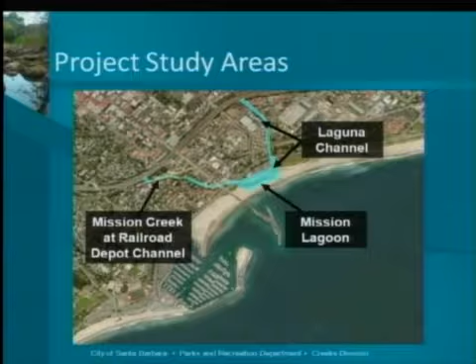George? Thank you. This evening I'll be giving an update on the Mission Lagoon and Laguna Creek project. It's a project that the city started actively pursuing about 2 years ago, so I'll be giving a brief update on what has happened and where we're going with it. To refresh everybody's memory, the project study areas basically entail 3 distinct, more or less sub-projects. Starting over on the western portion there, Mission Creek at the Railroad Depot Channel, and then on the waterfront, Mission Lagoon. And then on the eastern portion there, a small portion of Laguna Channel, which is known as El Estero Drain.

So for background, city staff and members of the public, including business owners, special interest groups, environmental groups, put together through a pretty long process of public outreach these project goals, which really encapsulated the Creeks Division's main purpose, which is to improve water quality, native plant habitat, wildlife habitat. But also because of the nature and location of these projects, encompassed a wider array of project goals, including flood control, which I'll talk about specifically as it relates to the Laguna Channel pump station,

a wide variety of surrounding infrastructure, including the multi-purpose pathway, the parking lots at the railroad depot channel, obviously the railroad tracks and the railroad depot itself, the many existing uses such as recreational uses along the waterfront, the harbor dredging operations, and then obviously the aesthetics. This is really a doorway to Santa Barbara. Public safety issues associated with both flooding, but also any sort of fall hazards associated with the creek restoration areas, and then ensure consistency with the numerous city projects, including the Lower Mission Creek Flood Control Project, and various other management plans that regulate and define a lot of the operations in the city waterfront area.

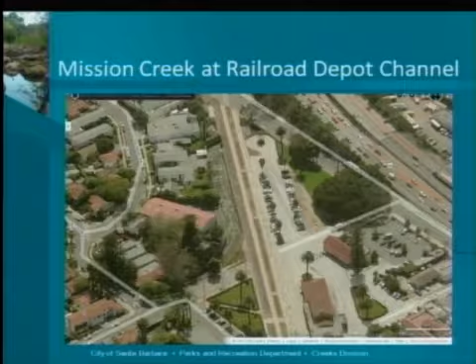So jumping upstream at Mission Creek, this is looking down on the railroad depot. So the actual depot building is in the center lower right there. And if you look right dead center in that photo, you'll see the actual channel itself. And to the right of the channel are the railroad tracks. And so let's jump down to a ground level view. This is looking upstream Mission Creek.

We've got these historic sandstone walls, which create a lot of constraints for doing any sort of modifications on this stretch of Mission Creek. Basically, those walls are part of the National Register of Historic Places, and so we can't modify them to an extent that would take away from the historic nature of that designation. And so really our focus was more, how do we restore certain functions to the creek, whether it's increased fish passage, better water quality, and more wildlife habitat within the confines of basically the channel bed.

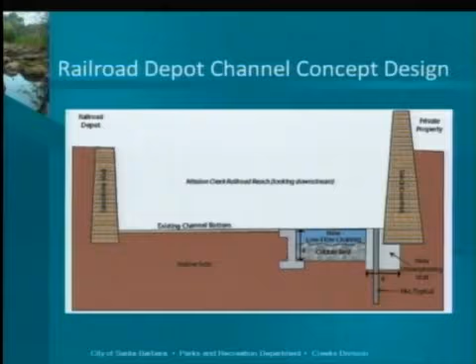Our staff recommendation is let's put this concept level out there, but let's not take it forward because we've got 2 other projects that are higher priority. This is available for either other agencies to look at as a potential design, or in the future, if there are modifications, this is one that is technically feasible at a concept level.

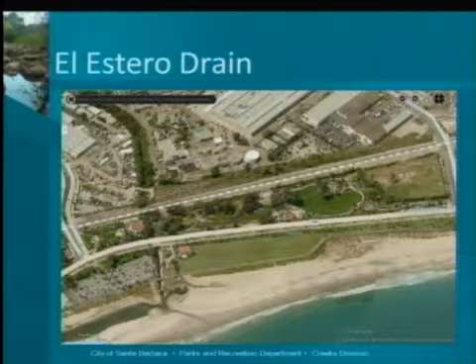And we can zoom in on that at the ground level. There's that big white tank there, and this is the existing El Estero Drain. It does have a bit of history that I outlined in the staff report. Basically, the summary of that is the city has an obligation to restore a portion of the channel. And the proposal that the Creeks Division is putting forward as a restoration plan would supplement that required mitigation that Public Works is required to do.

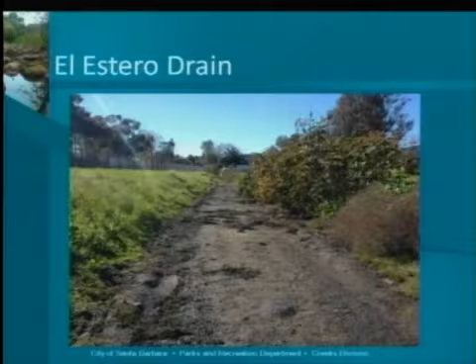And so what is the proposal then? You can see the existing condition right now at El Estero Drain is there is a channel bed there, not a lot of vegetation, mostly dominated by non-native exotic weeds such as castor bean. And then looking down the channel towards Laguna Creek, the bed itself is underlain by basically a plastic liner that was installed in 2002, and so Public Works, as part of their proposal, is going to remove that liner and do some restoration.

And so the Creeks Division is proposing to come in and, in the areas where Public Works is not restoring, take care of the rest of that portion of El Estero Drain and restore open water pond habitat that would be beneficial for southwestern pond turtles, emergent wetlands, so species such as tules, rushes, sedges, to provide some cover and shading on the channel, and then upland habitat in a mix of native grassland species and some shrub coverage. We don't want a really dense cover there because the southwestern pond turtles, although an aquatic species, use the upland areas for nesting and other parts of their life cycle. So that's the habitat side of things.

At a concept level, we also have a big water quality component, and there are obviously a lot of permitting issues and details to be worked out with this, but the proposal from the consultants is during low flows, so primarily during the summer, they looked at a possibility of moving some of the water in the main stem of Laguna Channel, pumping that up to the top of El Estero Drain, and basically letting it flow through what is more or less a constructed wetland that has both habitat value and a water quality improvement value. So that's looking at it from top down.

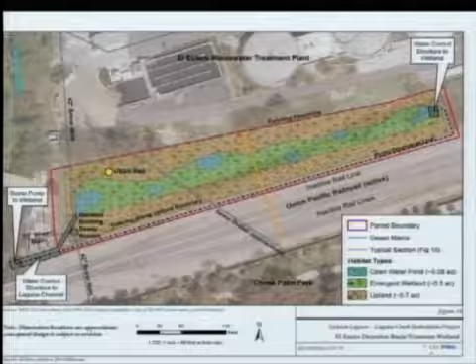If we do a cross-section, another big part of this concept is to do more excavation from the existing topography. So you can see in that hashed line, that's the existing topography, and so the proposal would be to remove all of that material and create more wetland habitat.

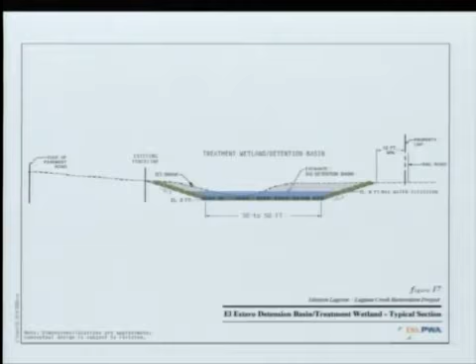So going forward, we're coordinating with Public Works staff on how do we combine these two restoration projects, limit redundancies and effort, and end up with a project that is a lot better than the existing condition. So for the Creeks Division, we're going to be refining the scope of work and the technical studies that are going to be required to produce a preliminary design and eventually a workable restoration project.

We anticipate in the next month or so we'll wrap that up in consultation with the wastewater folks, and then we'll go out, hire a consulting firm that has expertise in wetland restoration, water quality, special status species such as the southwestern pond turtle, and then we'll bring it back to the Creeks Committee with a preliminary design at that point. So that's where we are. I'd be happy to answer any questions, or Pat is available again for specific questions related to the waterfront portion of the project.

Thank you, George. Excellent presentation. This is an item for discussion and comment, so I hope you all have questions. I'd like to start at the end with the El Estero portion where they're proposing to dredge to make the proposed wetland areas larger and more self-sustaining. What do you and our Public Works partners propose to do with the material that's scooped up?

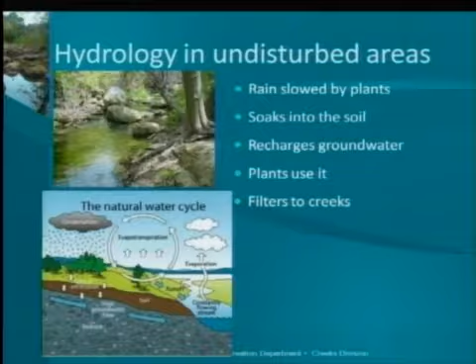When a natural area is paved, all of the pollutants that are associated with that pavement from the use of the pavement, like pets, automobiles, any kind of trash, any kind of other waste, the rain pelts down on that pavement, loosens those things up, carries a concentrated mix of that to the storm drain, where it goes right to the creek. And those quick flows can degrade aquatic habitat, riparian habitat, and they don't really contribute much to groundwater.

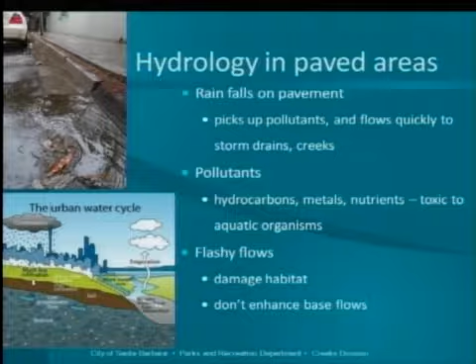And so I'm going to talk about low-impact development hydrology, and in particular permeable pavers. The purpose of these is to mimic that natural hydrology. First of all, they allow for the existing use, like a parking lot, a street, sidewalk, or an alley. Any rainwater that falls on that site might pick up some of those pollutants, but it percolates through the gaps in the pavers, goes into a rock layer below, and into the subgrade soil below that, where microbes in the soil and plants surrounding there can process those pollutants, degrade them, uptake them, and then anything left follows its natural course in the groundwater, either deep groundwater or over to the creek.

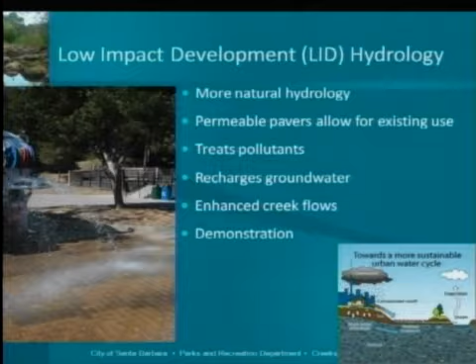This is a cross section of the permeable paver design that we've implemented. On the top, you have permeable pavers, and below that is a gravel layer, 3 different layers of rocks, and in between those rocks is not sand; it's just an open void space, and that allows for the storage of water. That allows for microbes to reside on that surface, and below that is the subgrade, kind of a native soil. Rainwater percolates through and is able to be stored in here because this is contained by edge restraints. So you basically have a basin. So when you have really heavy rains, it gives it time to soak into that soil.

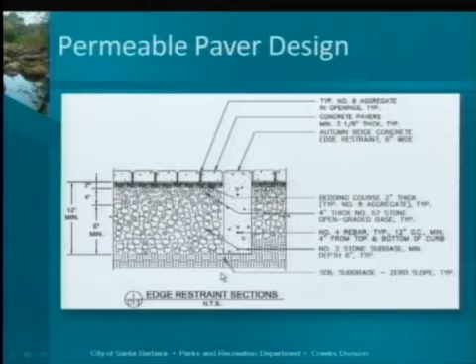In 2011, the Creeks Division completed the MacKenzie Park Stormwater Infiltration Project. This was a pilot project for permeable pavers, and it was done in a hybrid design in the parking lot there, where the parking stalls were replaced with a permeable paver system, and the driveways were kept as asphalt. And any rainwater that fell on the whole parking lot flows into these permeable paver systems.

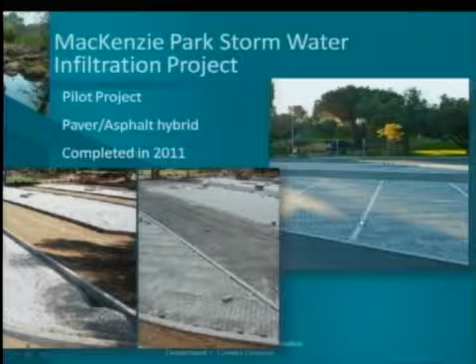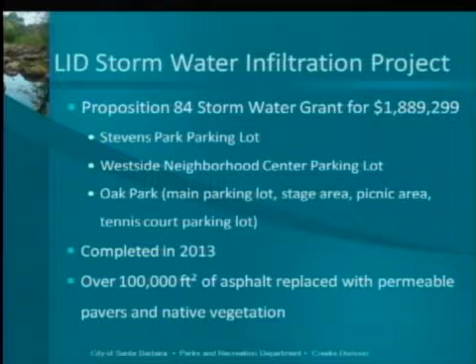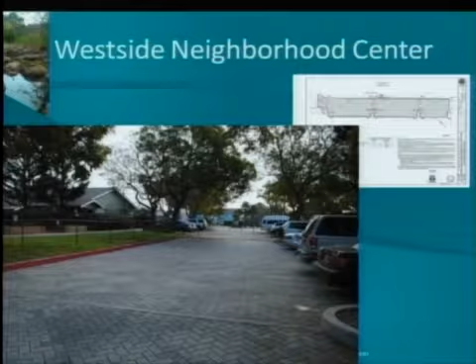In 2012, the Creeks Division applied for and received a grant from the Proposition 84 Stormwater Grant Program for $1.889 million. That was for the construction of permeable paver systems at 5 different sites. It was completed in 2013 and consisted of over 100,000 square feet of asphalt replaced with permeable pavers and native vegetation. The project sites were Stevens Park parking lot, where the entire parking lot was replaced from Canon Drive all the way back, and the Westside Neighborhood Center off of Castillo between Victoria Street and Anapamu Street. A big portion of that parking lot was replaced with permeable pavers.

The Oak Park Tennis Court lot, where a large portion was replaced with permeable pavers, and then some riparian habitat was reclaimed. The Oak Park main lot really consists of 3 different sites: the picnic area, which you see here, the stage area, and then the main parking lot. All of that was replaced with permeable pavers, and a big portion along the creek was restored with native vegetation.

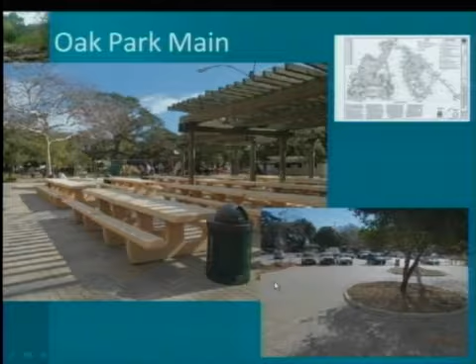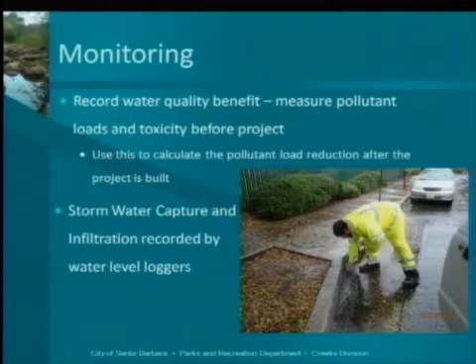In order to understand the benefit of these to water quality and actually measure the benefit, staff went out and sampled runoff from storms off of these sites before the project was constructed to measure the pollutants coming off. This was used to calculate loads that would be treated by the project once it was completed. We tested for bacteria, total organic carbon, nutrients, hydrocarbons, suspended solids, metals, surfactants, and general toxicity to aquatic organisms.

These are some examples of the data that came from this. These are concentrations of the pollutants, and this is bacteria: E. coli, Enterococcus, total coliform. On the left are the actual numbers of pollutants, so the higher the number, the more there is. These are each of the different project sites, and you can see the bacteria numbers were high, and they often exceeded AB 411 standards and contribute to beach warnings that we have at the beach and high levels in the creeks.

Another one that we tested for was hydrocarbons. This is an example of a test for extractable fuel hydrocarbons.

And you can see on the left is milligrams per liter, the concentration of samples that we got, and these are the sites. And it was done with 3 different storms. This is a box plot where it shows each storm for each site, and this is the levels of it. So pretty high, when you talk about 3 milligrams per liter, that's getting up there, and up to 5 milligrams per liter, that's getting up there for hydrocarbons, considering the amount of rain that's coming off.

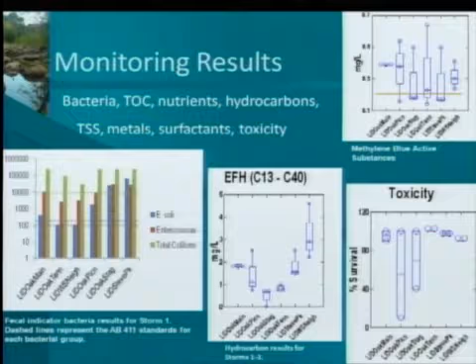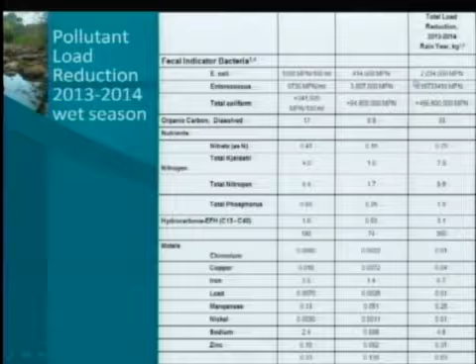And so we used these concentrations to find out the load of pollutants that were reduced. And this is an example of the calculation done for the 2013-2014 rain year. We got a little over 8 inches. So not that much, but on the far right, if you look over here, this was the total load reduction. Fecal indicator bacteria, this is actual number of bacteria, it's really hard to visualize in the millions. Total organic carbon, this is a lot of leaf litter, things like that contribute to eutrophication in the creeks, algae,

33 kilograms. Kilograms, 2.2 pounds, if you want to convert it in your head. These are the nutrients: nitrate, nitrogen, phosphorus. Over 8 pounds of some of these things. Hydrocarbons, 3.1. When you take that EFH, the extractable fuel, and you calculate for 100,000 square feet, you get 3.1 kilos, about 7 pounds of oil. It's maybe like a gallon.

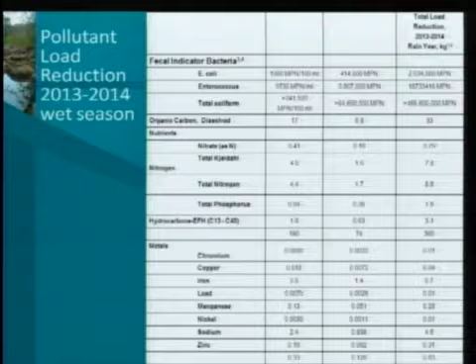And then these are different metals, some naturally occurring, a lot of them not naturally occurring. And these numbers, this is just for our project sites. You could extrapolate this to the entire city of all the impervious surfaces that we have, and you're talking about really, really high numbers of pollutant loads that are going to the creeks that didn't really go there before we paved these areas.

And so to confirm that we actually have captured this water and infiltrated it, we visually go out and check that the pavers aren't overflowing, but we also installed monitoring ports underneath the pavers, and so they go down to that subgrade soil at the bottom, and we put in a water level logger, and this measures the level of water beneath the pavers during a storm and after a storm.

And so this is an example of a chart that's made from that, and so this red line is the rainfall accumulated over, this was about a 4-day period in last February, early March, where we got 5.5 inches of rain. We got a really good set of storms, and this was how the water accumulated. This is the inches of rain right here, and so you get to see over 5 inches.

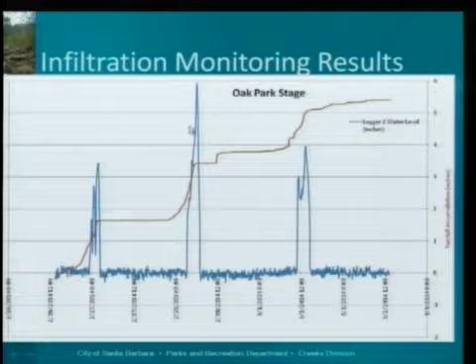The blue line here is the actual water level inside that basin underneath the Oak Park stage, and so you see it reached up here, and this is the number corresponding to that level. And so here it got just under 2 inches high, here up to 3 inches high. To put that in perspective, the total depth of that basin is about 15 inches in these projects. So it really didn't come close to filling up and was allowed to infiltrate all that water, and you see it drops down as it infiltrates.

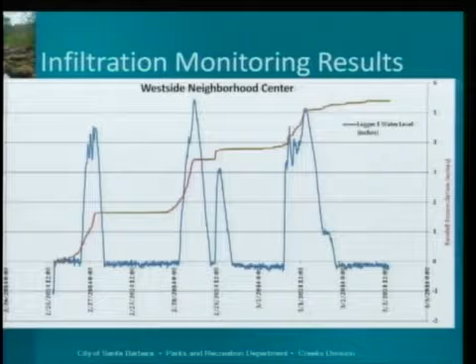This is another example at the Westside Neighborhood Center. Same storm. You see it gets up to a max of about 5.5 inches. A little higher at Westside Neighborhood Center because the runoff from the roof actually contributes more, so it fills up a little faster and a little more.

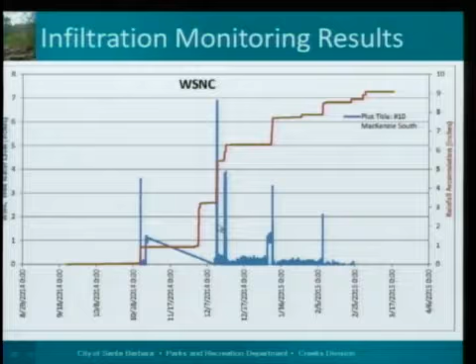This is the Westside Neighborhood Center for this last year. We've gotten 9 inches of rain so far. So this red line is the accumulation. This is starting in September. And you can see, the first storm, it popped up, got to 4 inches. We didn't have the logger in for this storm. We got another storm here, got up to almost 7 inches. And so you basically see the rise and fall of that water as it fills up in the basin and then infiltrates into the soil.

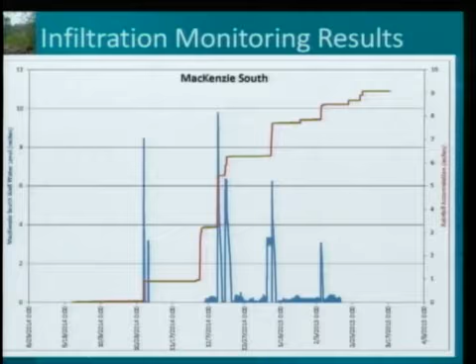This is the Mackenzie Park parking lot, one of the wells there. And this one fills up the highest because we've got that hybrid design. Gets a lot of runoff from the paved asphalt areas around it. So you can see during a big storm, it reached 10 inches. Those are a little bit deeper to handle more rain to get that 1 inch in 24-hour storm event. That's required by our stormwater permit. 10 inches here, but those are more like 18 inches deep.

So in 2014, Creeks Division applied for and received a grant from a Proposition 84 stormwater grant for $2.3 million, and that was for the construction of permeable pavers at the Plaza Vera Cruz, Service Road, the sidewalks surrounding Alice Keck Park Memorial Gardens, and the street surface and sidewalks on the 700 and 800 block of Quarantina Street.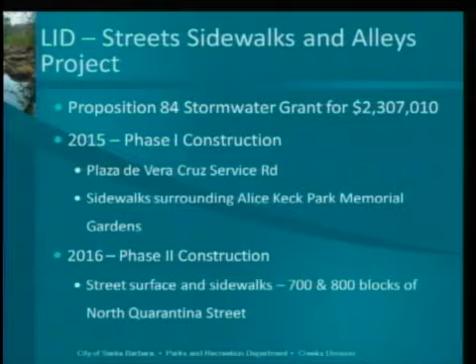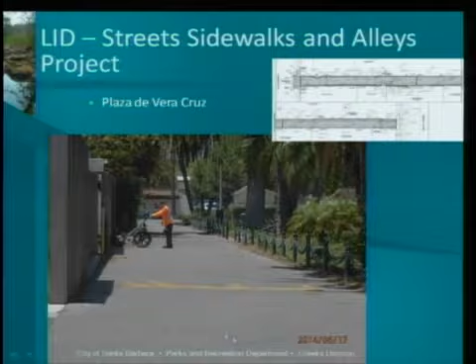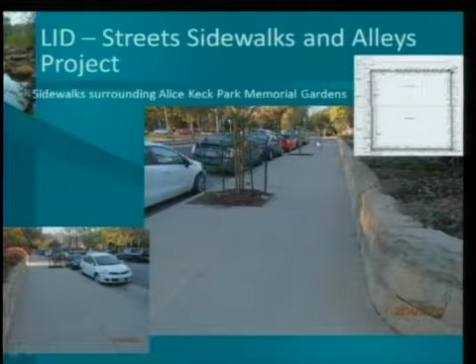So we did parking lots for the last round, and this round we're demonstrating putting permeable pavers in these other surfaces, sidewalks, alleys, and street surfaces. This is Plaza de Vera Cruz. This entire Park Service Road will be replaced with permeable pavers. This is the sidewalk surrounding Alice Keck Park. It's not only the sidewalk, but a lot of this right-of-way strip is paved as well. So all of that stormwater will be captured with the permeable pavers.

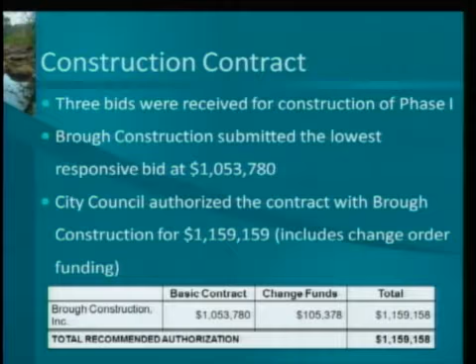And the 700 and 800 blocks of Quarantina Street. This is the 700 block, and back there's the 800 block. We're doing the sidewalks and the street surface. So that's going to be done in 2 phases. Phase 1 will be done this summer, and we went out to bid for that project. 3 bids were received. Brough Construction submitted the lowest responsive bid, and yesterday City Council authorized the contract with Brough Construction for $1.159 million, and that includes a change order funding of $105,000.

So, as I said, Phase 1, Plaza de Vera Cruz, will be done this summer, starting in May, and then in July, after the summer solstice parade, the sidewalks surrounding the Alice Keck Park Memorial Gardens will begin construction, and those will take place this summer. Next summer, we will start in between the school years on the 700 and 800 blocks of North Quarantina Street and sidewalks, because that's right by the junior high. And that concludes the presentation. I'm happy to answer any questions.

Yeah, thank you, Mr. Burgess. Really, really comprehensive update. I was wondering, earlier in your presentation when you were talking about the bacterial and chemical levels measured, are we still contracting with Trish Holden at UCSB, or are we doing that in-house now?

I think we're still working with Trish Holden and UCSB, but that's more for the human waste marker studies that we're doing, and we didn't do that here. What we did do is regular bacteria results, and the El Estero wastewater lab does that. But for the other pollutants like metals and hydrocarbons, we contract that out to an outside lab to get those results. Yeah. Thank you. I want to see if Penny had any questions.